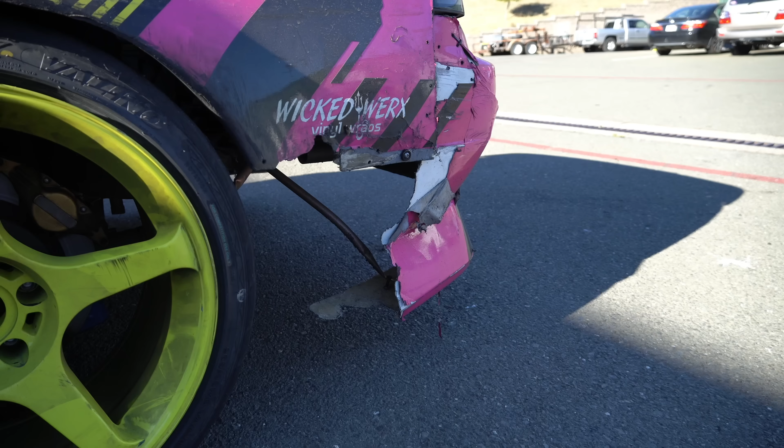They'll hook you up. Getting the Drift Cat all ready to go. Adding weights to simulate my weight in the car, because obviously when you balance it, you gotta account for the driver's weight. So kind of give us a rundown of what a corner balance is, because this car has never been corner balanced before. So corner balance, obviously, you want the car as even as possible.

You can make adjustments to make it kind of more weight in the front, more weight in the rear, but that's going to be kind of shedding weight or adding weight to the car. Okay. What we're really going to be doing is trying to get the weight kind of cross balance. So because you have coilovers all the way around, everything's adjustable. Kind of works as like a pendulum, if that makes sense. Okay. So basically, we're going to be adjusting right front to left rear, left front to right rear.

What we're going to be doing is, if it's off a little bit side to side, we can actually raise one side to kind of get that weight off of it, and then lower one side to get the weight onto wherever we want. That makes sense. Yeah, it does. So hopefully that makes sense to you guys as well. But I'm guessing this car is going to feel a whole lot better after it leaves here.

Well, we'll see where it is. Obviously, there's not very many drift Hellcats out there. Yeah. So we'll figure it out as we go. Awesome. Yep. Thank you, bro.

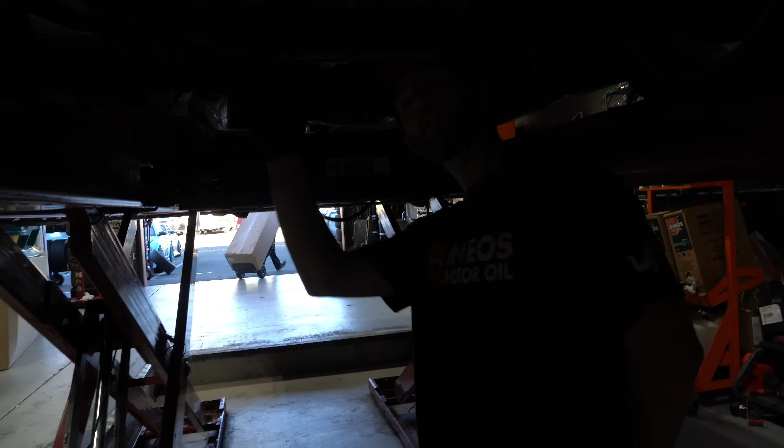Yeah, so the good thing about these is I didn't know if these were front rack or rear rack. So it's better for adding caster, having that kind of drift car feel. Yeah. It's obviously S chassis stuff. They come stock rear rack, but there's a lot of modifications that need to be done to get the right feel. B-knuckle, all that stuff, they run pretty high caster.

But it's something that's, I won't say can't be done, but it's harder to be done if it's just a stock rear rack setup. But front rack is, in my opinion, a better feel. I come from BMW. They're all front rack. I like a lot of caster for a quick, big flick. So we'll hook it up, see where it's at. Hopefully get that feel for you.

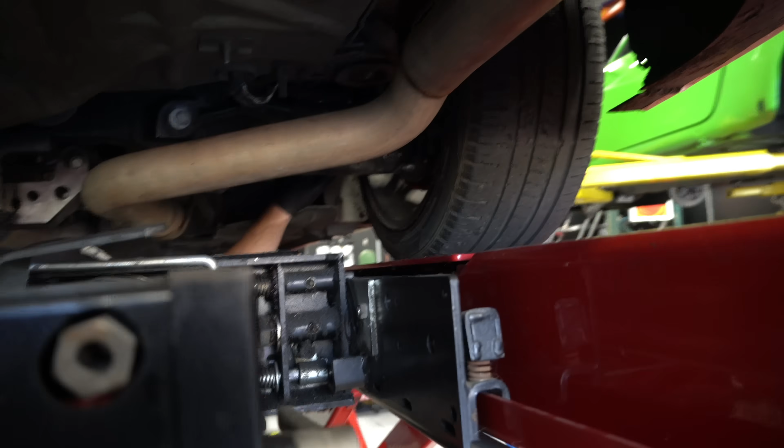So you flick this thing pretty good. Hell yeah. So I'm already learning a lot. It's been like 10 minutes. Rear's mostly stock. Yeah, I need to upgrade to the nice anodized red AAD performance arms. So these are my scales, huh? These are them. A little dirty, but work good.

Stock from factory, they're supposed to weigh like 46. I don't know if it lost weight with the manual swap or not. That's always been a question. See, there's a lot of parts on here that should be lighter than factory parts.

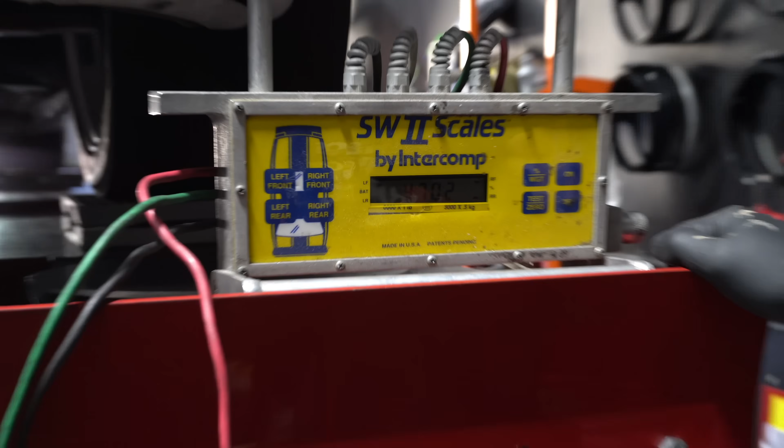More than I thought. Heavy son of a bitch. Damn, 4702. That's with me in the car, technically. Minus 170-ish. This thing is a boat, and we've just confirmed it. So it lost a little bit of weight doing the manual swap. It definitely needs some weight reduction, though.

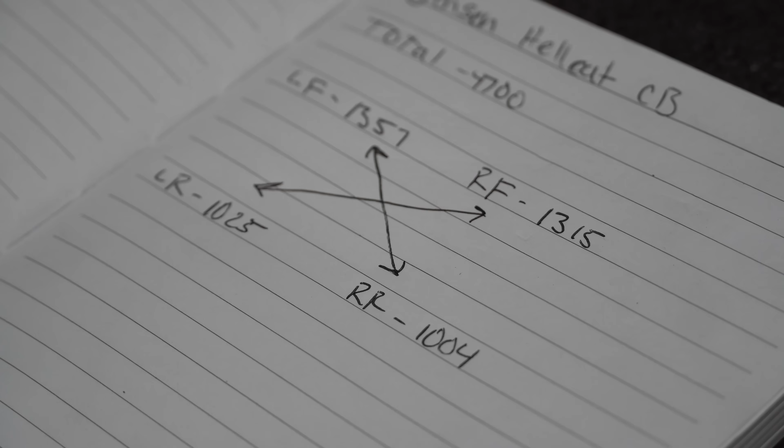Full interior and everything, I've never really focused on losing weight with this car, but I'm pretty sure that's coming soon. Still a street car, right? Yeah, for the most part. But so definitely a little front heavy. Definitely. So we'll figure out exactly what it is. So like I was talking about, the only way to adjust it is kind of ballast in the car. Obviously, you have a giant V8 in the front.

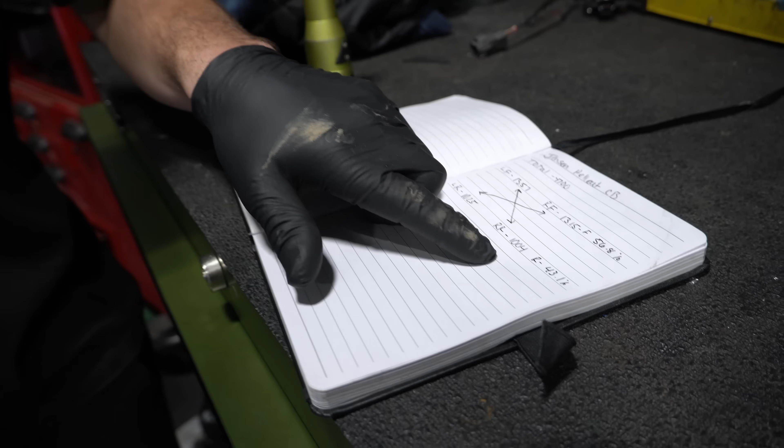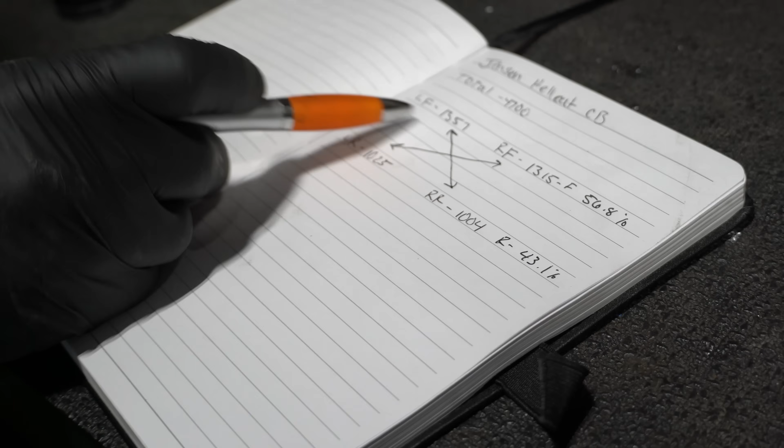There's not a lot of weight in the rear. Yeah. So there's not much we'll be able to do with the front to rear ratio. But the biggest thing is, like I was saying, the side to side. So you can see the left rear is heavier than the right rear, and the left front is heavier than the right front. So basically, the whole idea is to try to get all these corners as close as possible.

Okay. So with corner balance, especially with the driver sitting in the car, you don't want a bunch of weight on the left side. So in race cars, they're putting batteries and fuel cells and stuff on the right side. They try to counteract all the weight that's on the driver's side. But we'll figure out what that percentage is, and then we'll adjust the coilovers accordingly. Hopefully, we can get as even as possible.

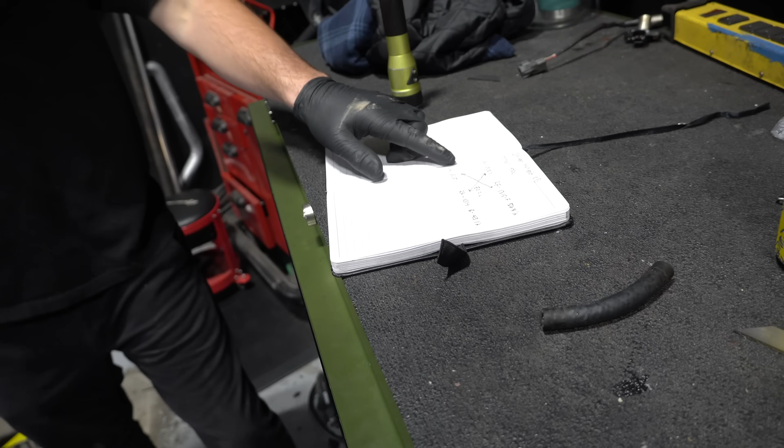So left front to right rear is 50.2. We are 49.7 from the left rear to the right front. That's actually very good. Honestly, there's not going to be much more we can get out of this. Like I was saying, the front and rear depends on what you do with the car. A lot of pro cars now have a lot of weight in the front, so they run a little bit more rear weight ballast to try to get that grip to dig out of corners.

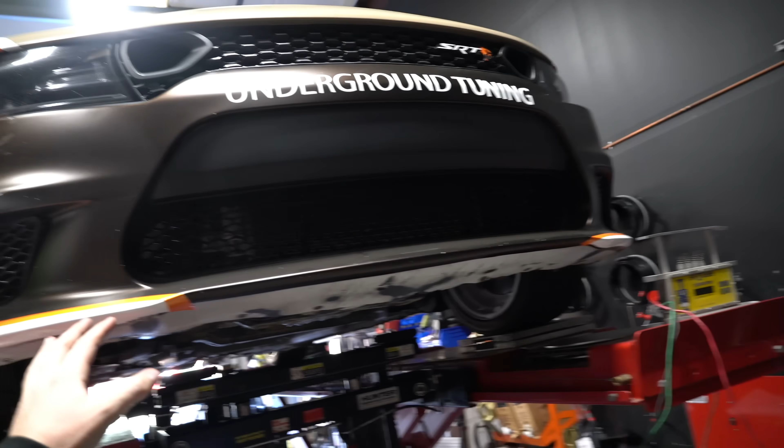So this thing is ice. There's no grip with it. You've got to get a stickier tire for it, it looks like. Those are just so expensive in 20s.

But this is actually really good. I did not think it was going to be that close, I'm going to be honest. What'd you think it was gonna be? I would assume it's probably going to be like a 55-45 split, which is still pretty good. But I put Porsches and stuff up here all the time, and those aren't even that close. All right, that makes me feel better. Looks like you know how to put suspension together. Slightly. Not really, but I pretend to know what I'm doing.

Talking about getting this car ready for other events, Winter Jam is coming up, which is here at Sonoma Raceway. I mentioned that I'm trying to do a dual caliper setup with this car for a handbrake, but with all the suspension arms behind this rotor, it's really hard to fit any decent sized caliper back there. But he's convinced me to go inline. I've seen a couple people do it. Parker Mitchell, Cleetus's brother, just did one in his manual swap Charger. I might just go inline so I can have a handbrake, because this car with a handbrake is gonna be a huge game changer.

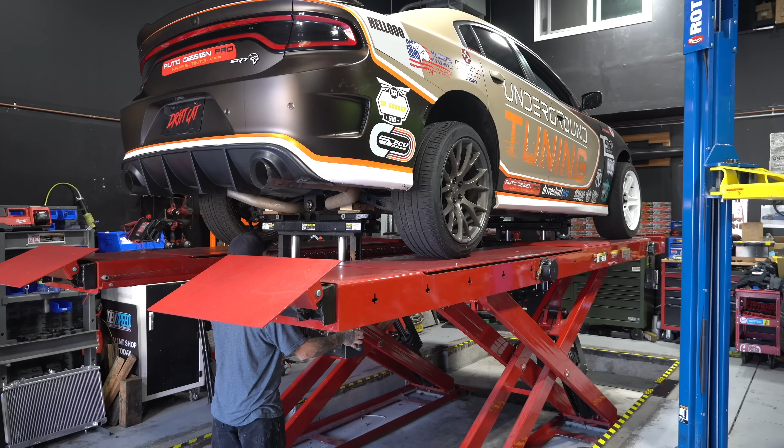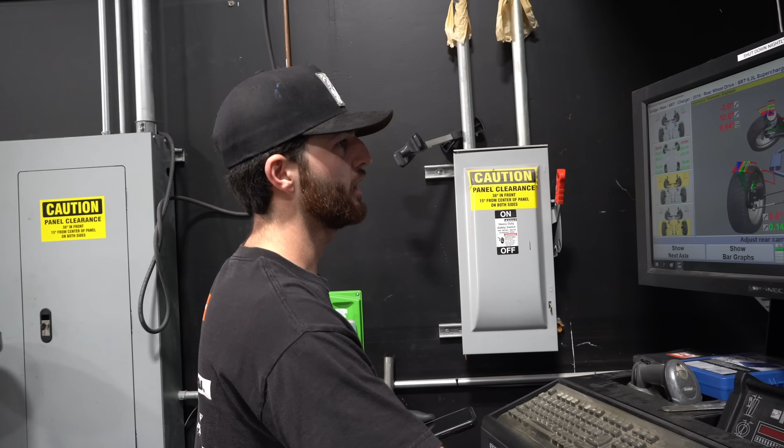But I know you said you were feeling some weird stuff in the car. Yeah. So it may be worth trying something new. With what you're explaining, it seemed like there wasn't enough caster in the car. But like I said, I wouldn't go higher than that. Obviously, we don't really know this kit. But for the most part, that should be ripping the wheel out of your hands.

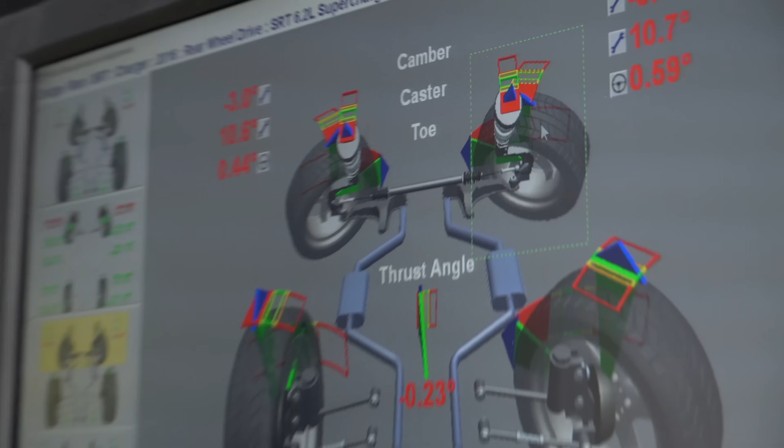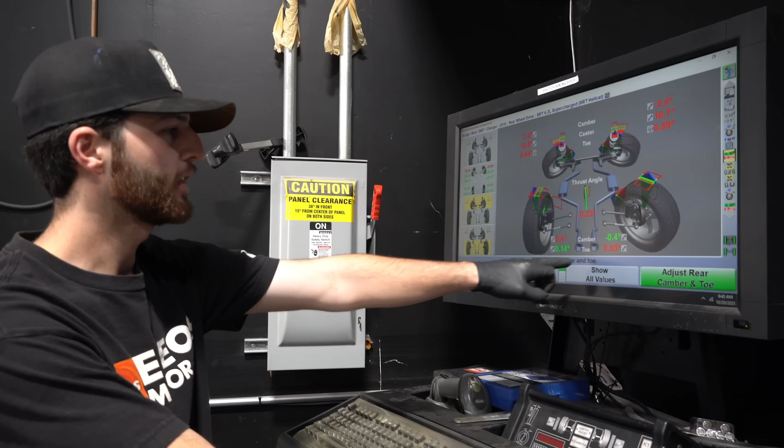In the front toe, there's a lot of toe in. Usually, it's a little bit of toe out, maybe zero toe. So that could be part of your problem. Camber is pretty close, but we can change that, maybe add a little bit of front camber. And then the rear camber is pretty close. This one's a little bit negative.

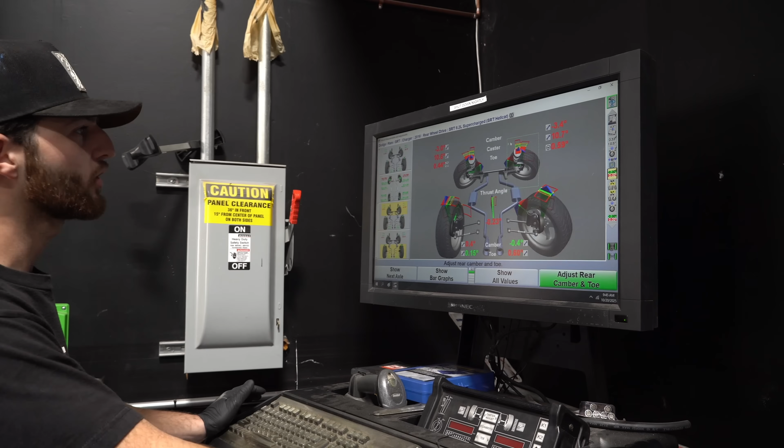This is actually a little bit positive. And then this is super far toed in on the right rear. So nothing that's super crazy out of whack, but definitely something we can fix up, make it right.

So I'm sure you guys can tell in a lot of these videos when I'm drifting or sliding the car, it does not have a lot of forward bite or grip in the rear in general. It has to do with the burner tires that I usually run. I never buy super grippy tires just because they're hella expensive and I'm gonna destroy them anyway. But we're gonna set this car up with a little bit more grip.

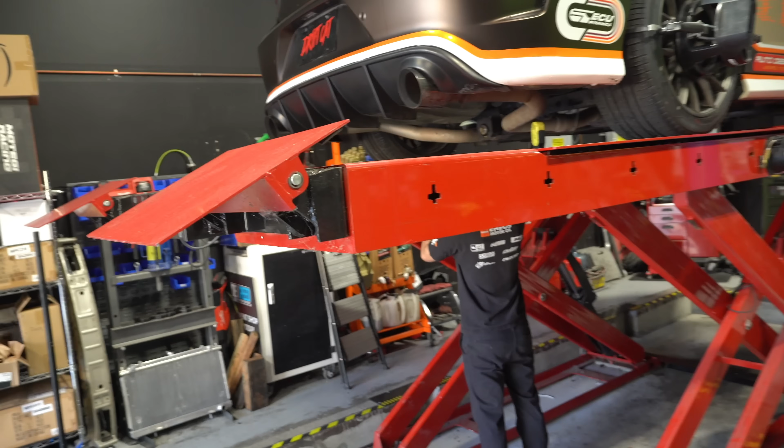You said a little more toe in the rear? A little bit more toe in the rear, hopefully give you some kind of forward drive. Nice. So hopefully we'll be a little bit faster out there and not just on butter the whole lap.

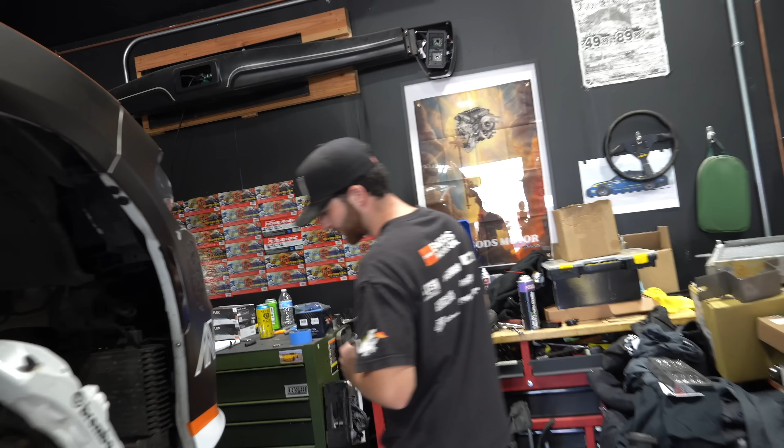So he just pointed out that this tie rod was a little loose, and the Ackerman settings? Yeah, so Ackerman settings are off, which is basically where they sit in the knuckle. But if you look under here, you can see the marks actually moving around. So this one's definitely off. Obviously toe is off because that's moving around compared to this side.

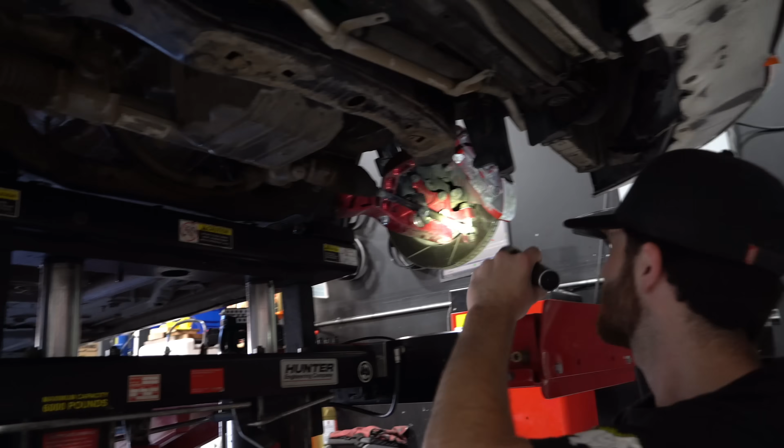So basically, that's higher Ackerman. That's what you want. Just not loose. This one is low Ackerman. So I'll take that off, make sure I Loctite it, torque that down. It'll move this one out to where it should be.

So nice. Getting closer. Finding a lot of stuff that's wrong with this car, but we're getting her all ready to go. Huge shout out to these guys at Devspeed.

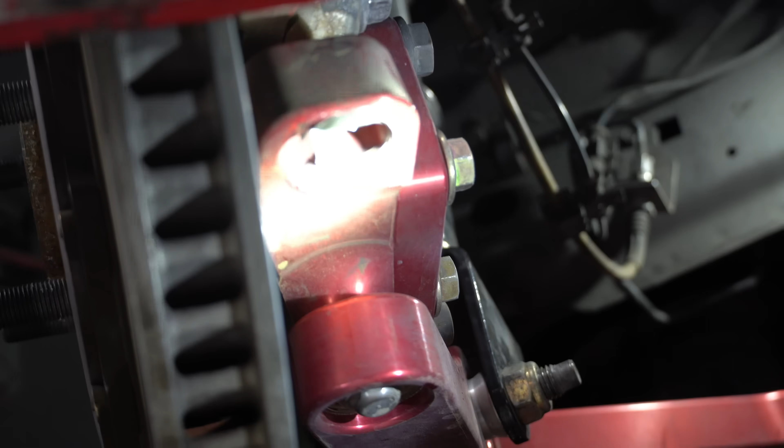There's just 2 spots in here. So this will be lower Ackerman. This is higher. But because this bolt came loose, it was kind of moving around. So it actually wore out this whole area here.

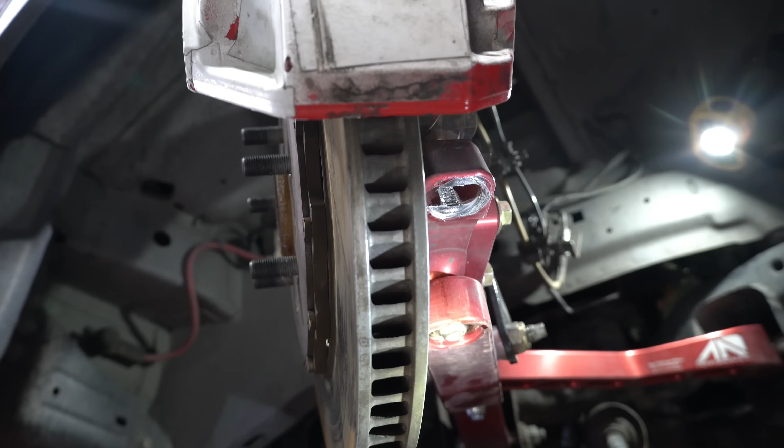So I think obviously you're leaving pretty quick. So I can basically put it on the outside one. Hopefully, maybe I can get some of that out of there, see if it'll sit in there how it should. But I think that's something that hopefully you can get maybe a new one of these. Yeah, should be able to. Just replace it. If you're not doing any super high speed stuff, it'll be okay.

So like I said in the past couple videos, I'm going to be taking this thing to South Carolina, and AAD is in Missouri, so I might be able to stop by their shop, get that part that is lightly destroyed, and then get the shims so we can mess around with the caster a little bit, so when I come back, we can really dial in the alignment and get it ready for Winter Jam.

The next couple events are just mainly donut pit events, so I'm not too worried about it. I'm not going to be in third gear going super fast. I'll probably be in third gear, but I'm not going to be gaining a bunch of speed. It'll be mostly circle stuff, so not too worried about it, but definitely gonna get that taken care of in the future. Hopefully I can stop by AAD, pick up those parts, and then as soon as we get back to the bay, come back up here and get it realigned.

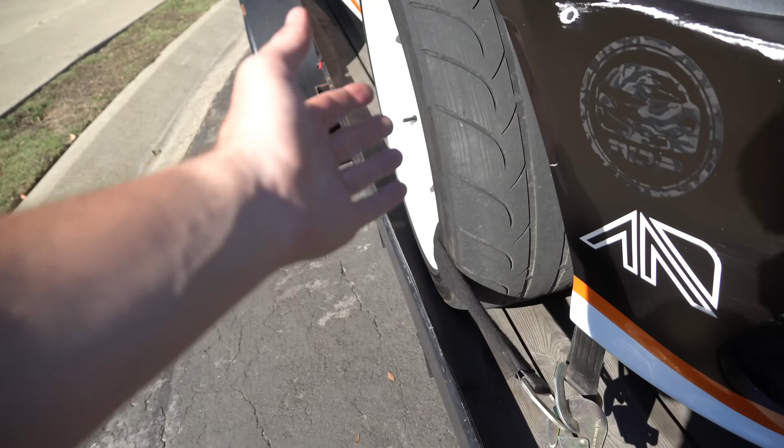All right, got this thing all loaded up, ready to go. Huge shout out to the homie PJ for letting me borrow his 3500 Cummins and trailer. He did a bunch of modifications to be able to fit this car onto this trailer, because after throwing on the angle kit, it is so wide it doesn't fit on regular trailers.

So if you see how tall this lip is compared to this lip, he cut off this much of the trailer and then added a bunch of rigidity and angle iron and stuff. He made this fender removable so I can remove the fender, open the door, get in and out. Thank you, PJ. Really appreciate you. He set us up for this trip.

Yeah, she got a fresh alignment, corner balance, and then all the stuff that Dusty Speed Shop did. So we got to load our spares, our tools, pack this thing, and then hit the road to South Carolina. It's going to be a mission.